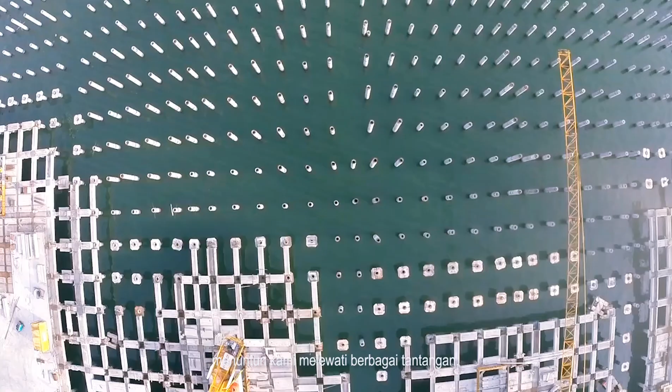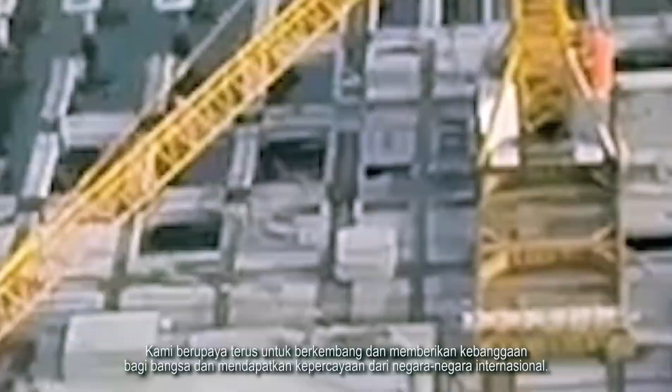Our footsteps are a journey, leading us through various challenges, in order to give pride to Indonesia. PTPP Persero, established since 1953, grew with the nation with monumental works in Indonesia. Committed to be at the forefront of construction and investment, we strive to continue to develop and give pride to the nation and earn the trust of international countries.

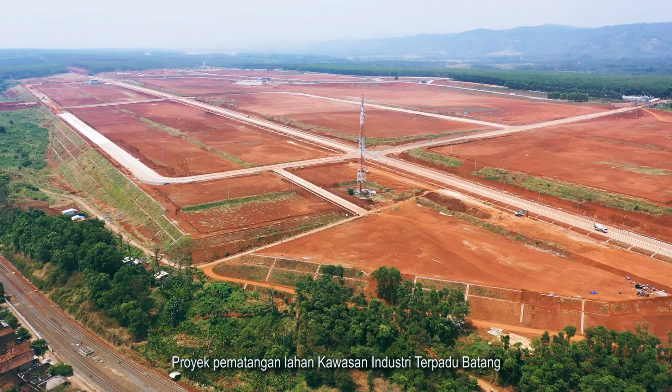Currently PTPP Persero, through the Infra 1 division, is trusted and given the task of completing the first phase of the Cluster 1 land grading project of Batang Integrated Industrial Estate. The Batang Integrated Industrial Estate land grading project, carried out by the PTPP Persero Infra 1 division, became one of the mega projects with national strategic project status.

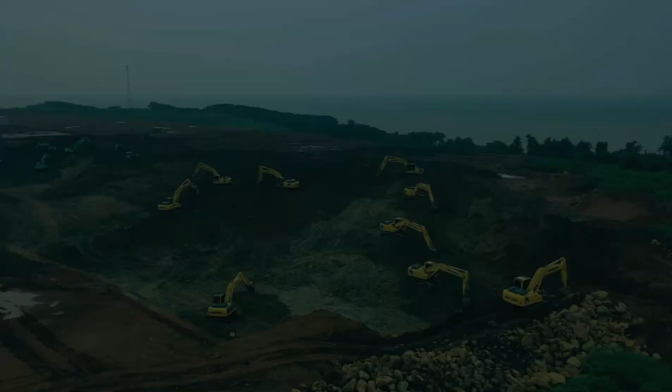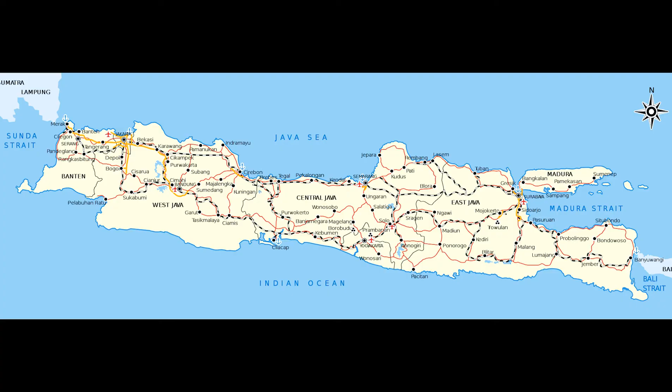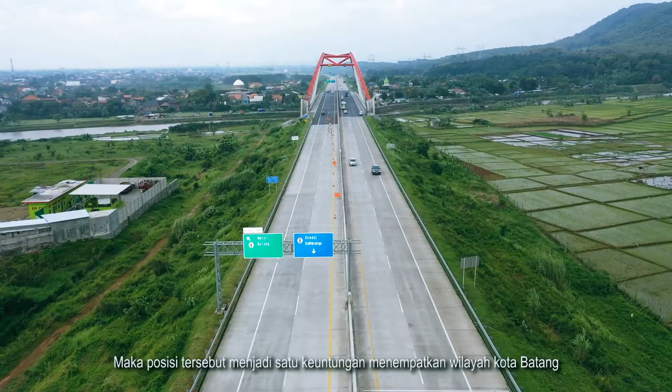The Batang Integrated Industrial Estate is located in Batang Regency, an autonomous region under the province of Central Java. It is located on the main route connecting the two cities with the largest industrial activity on the island of Java. With the Trans-Java Toll Road, the development of a railway station, and later a dry port will also be built. This position is one of the advantages of the Batang city area as an economic route on the north side of Java Island.

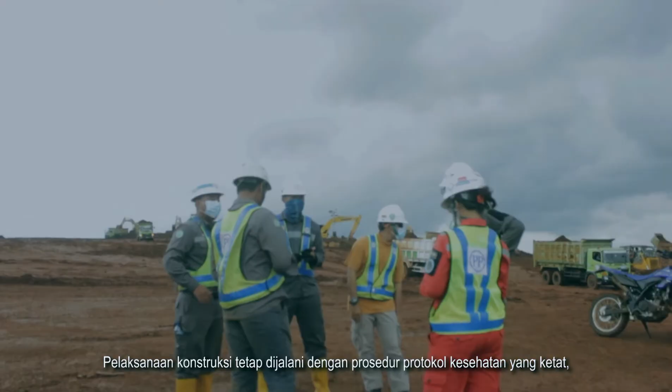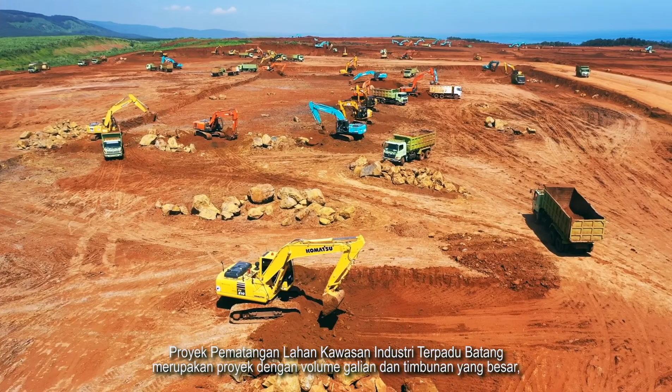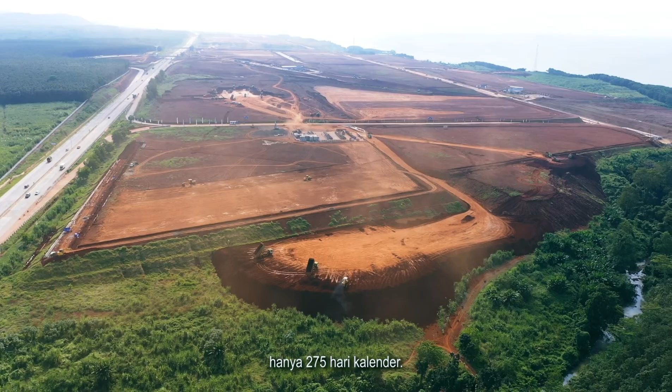Running alongside the COVID-19 pandemic, the construction will continue to be carried out with strict health protocol procedures, with supervision from the project HSE team and mutual awareness of each individual in the project. The Batang Integrated Industrial Estate Land Grading Project is a project with a large volume of earthwork, reaching 6 million cubic meters, with a short project duration, only 275 calendar days. The project location is divided into 3 zones, each separated by a river valley, limiting the movement of heavy equipment and transportation of excavated and embankment materials.

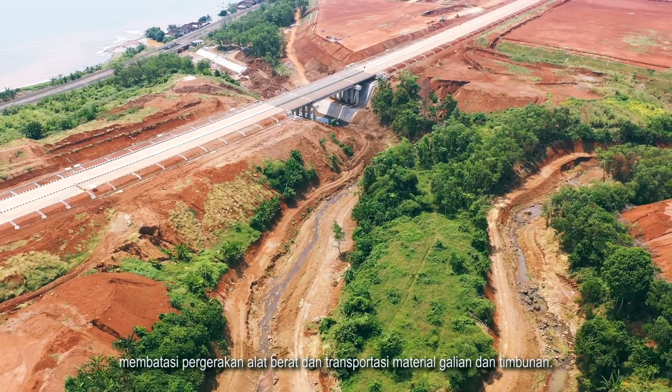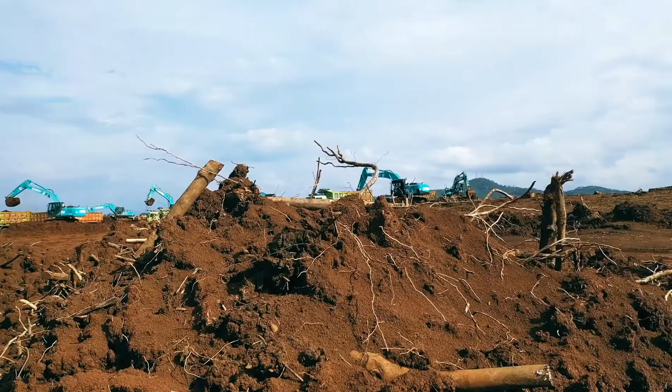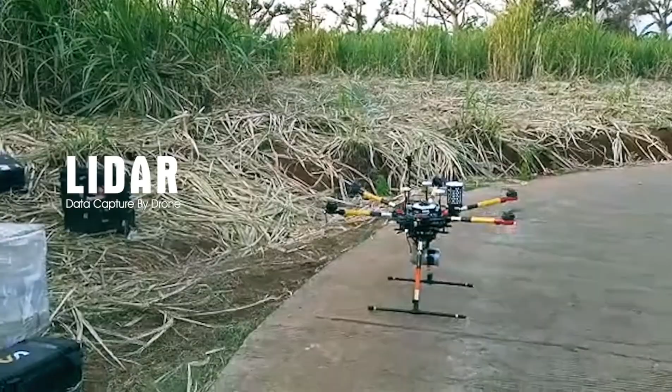The engineering team and the field team continue to innovate. Hundreds of heavy equipment are deployed. The goal is only one: how the project can be completed on target. Acceleration of work balanced with good quality control will maintain the quality and specifications of the work. For design purposes, topographic data of 450 hectares is required. Topographic data was obtained using lidar, where the results can be displayed and processed using Autodesk ReCap.

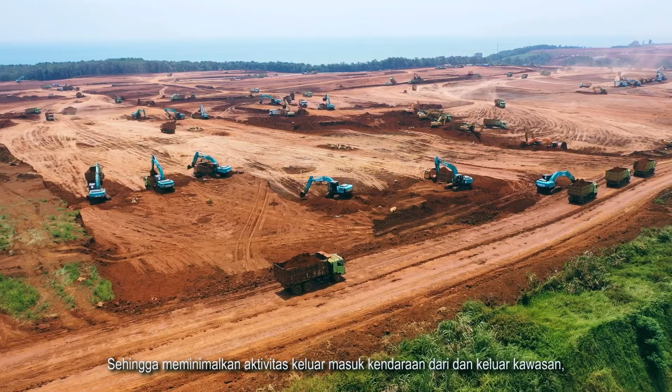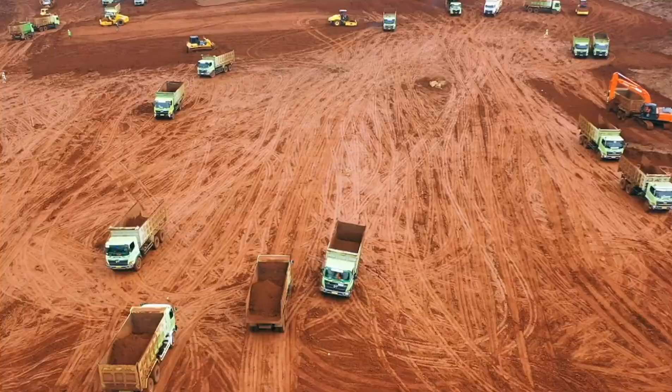The grading design is made in such a way that the volume of earthworks in the area as a whole and in each zone is balanced between the cut volume and fill volume, thus minimizing the activity of vehicles entering and leaving the area, as well as minimizing the transfer of heavy equipment and materials between work zones that are difficult to access. Iteration of the grading design can be done quickly using Autodesk InfraWorks.

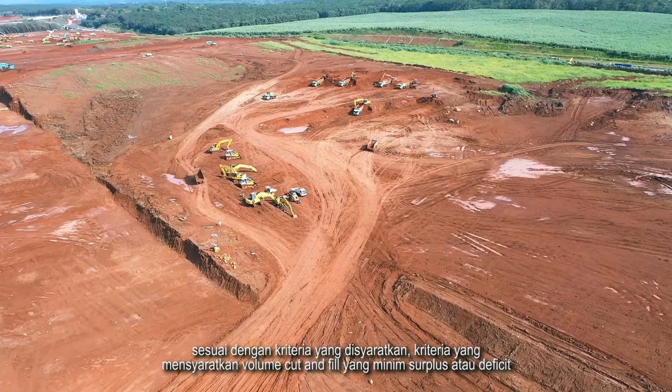The design options obtained are compared with each other to obtain the most optimal design in accordance with the criteria that require minimizing the cut and fill volume surplus or deficit, as any design change made to a plot has an effect on the overall cut and fill volume balance. This condition makes the speed of making comparison designs very vital in designing the grading of the Batang Integrated Industrial Estate. The conceptual design from InfraWorks was then detailed with Autodesk Civil 3D.

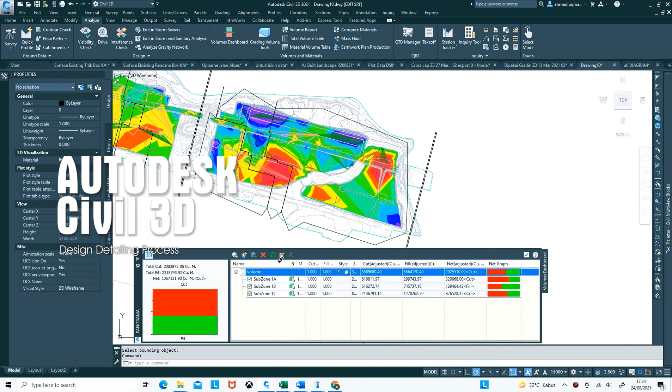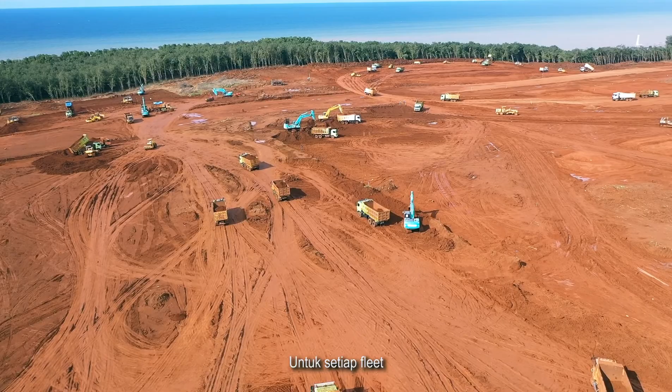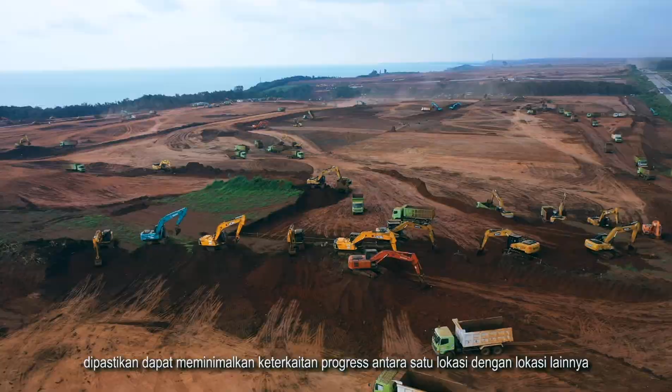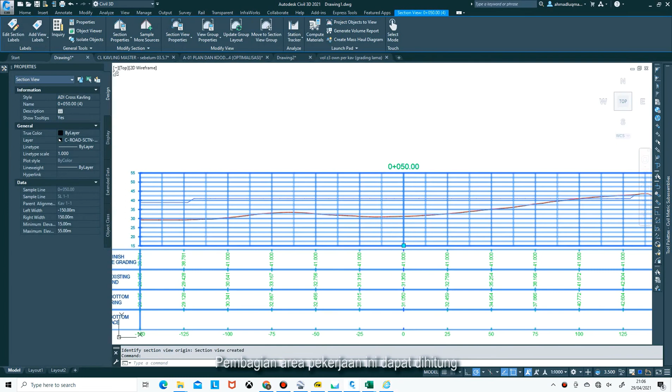With a large volume of earthworks and limited by a short duration of work, an efficient method of dividing the work area and equipment fleet is needed. For each equipment fleet, one area with a balanced volume of work is provided so that the movement of heavy equipment can be easily regulated. Besides that, the volume distribution must also be ensured to minimize progress linkages between one location and another so that delays in one location do not cause a domino effect on work delays. The division of this work area can be calculated quickly using the volume dashboard on Autodesk Civil 3D.

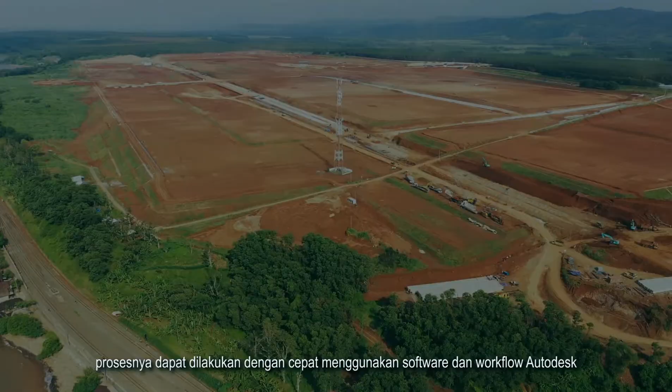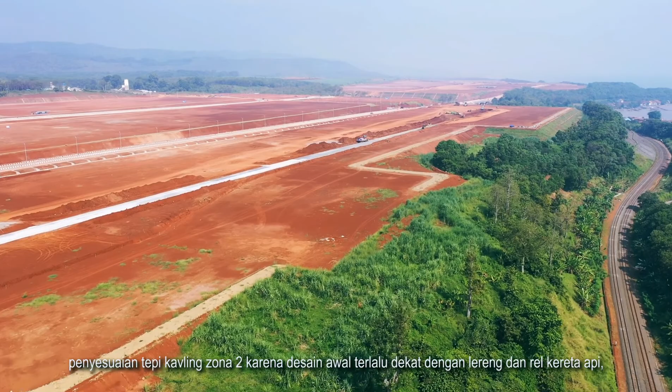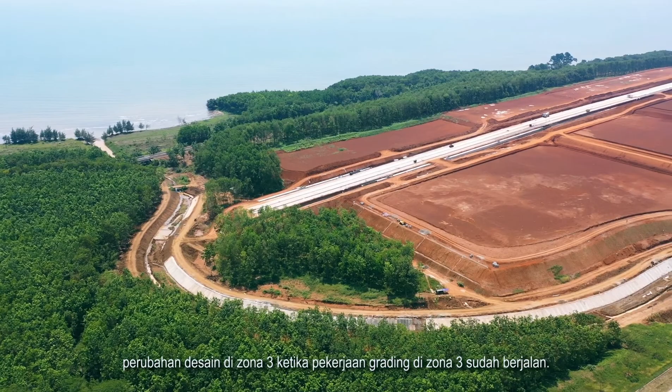Drawings in the form of cross-sections can be produced quickly using Autodesk Civil 3D cross-sections, and their volumes can be calculated quickly. Even though there are changes to the grading design in Zone 3 and Zone 2, the process can be done quickly using Autodesk software and workflows so that it does not interfere with work in the field. The design changes in this project include: first, adjustment of the edge of the Zone 2 plot because the initial design was too close to the slopes and railroad tracks. Second, the addition of plots in Zone 1. And third, design changes in Zone 3 when the grading work in the zone was already underway.

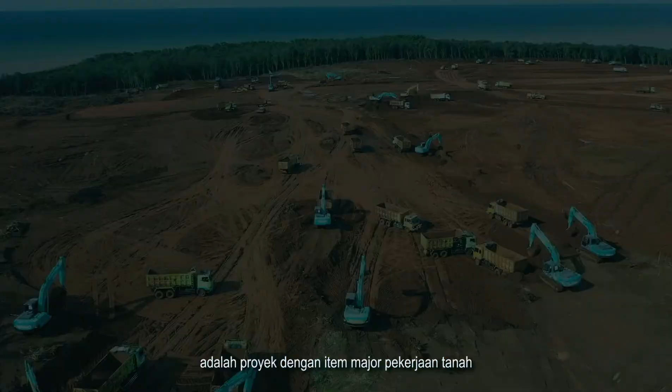The Batang Integrated Industrial Estate Grading Project is a project with a major item of earthwork with a very large volume that must be completed in a short time. The use of Autodesk technology in each workflow is very helpful in dealing with the challenges that arise in this project.